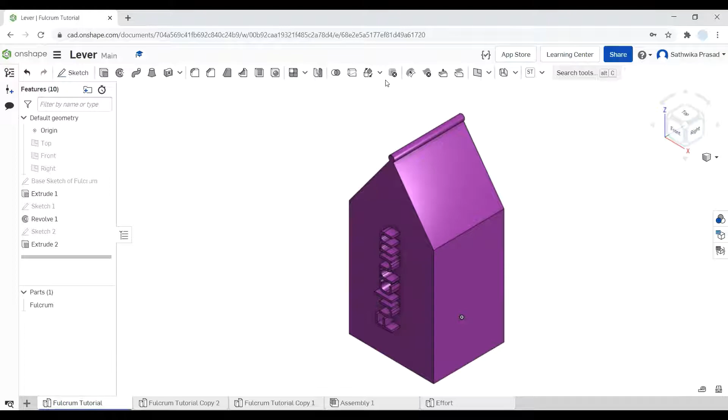I'm going to start off by making another part studio, and I'm going to right click and rename it to effort tutorial.

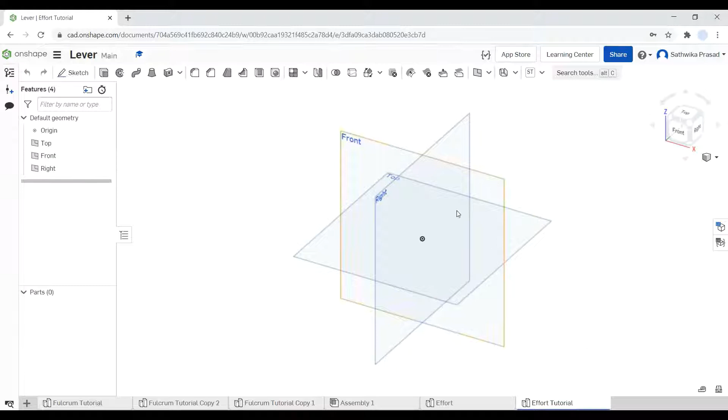So for this video, I'm going to make my sketch, if I'm not wrong, on my front plane again. I'll right click, make a new sketch, and start off by making it my view normal sketch plane.

So in this video, I'm going to introduce a new method of making arrows. If you notice, in this arrow my arrow is facing downwards, and my next arrow I'm going to make it face upwards. So I'm going to draw my line.

All right, so for this sketch, what we're going to do is start off by sketching this base arrow. How we're going to do that is we're going to mirror this.

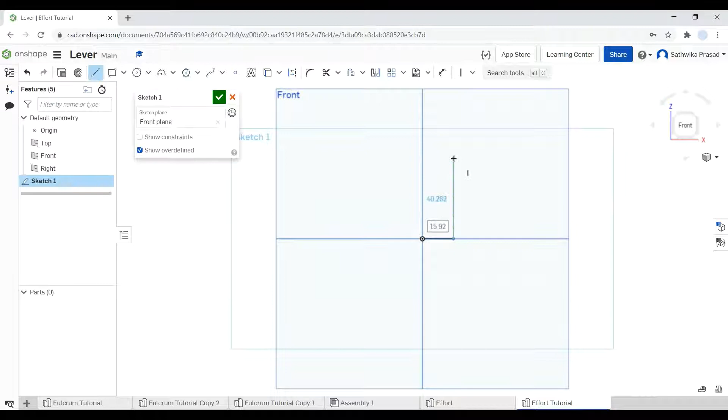So I'm making it again reflected, facing upwards. I'm going to make a sketch on my front plane, then make the base of my arrow, the body of the arrow, the little bit that sort of branches out of the arrow, then the line again, and then a dot that connects to the origin.

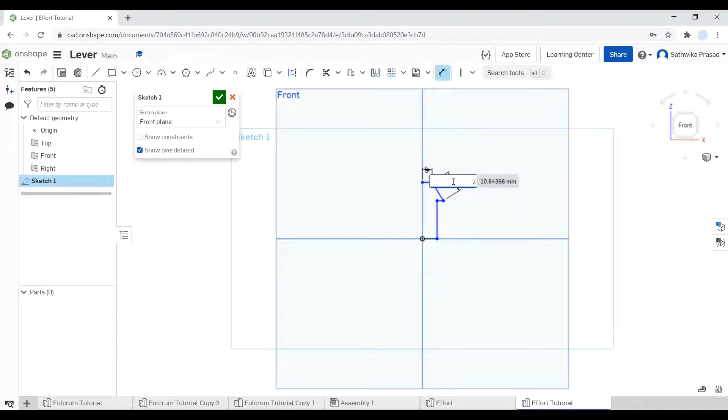Now I'm going to dimension everything. I'm going to make the top line 5, and this line 25. Actually, before I do 25, I'm going to delete this dimension. I want to make this line 40.

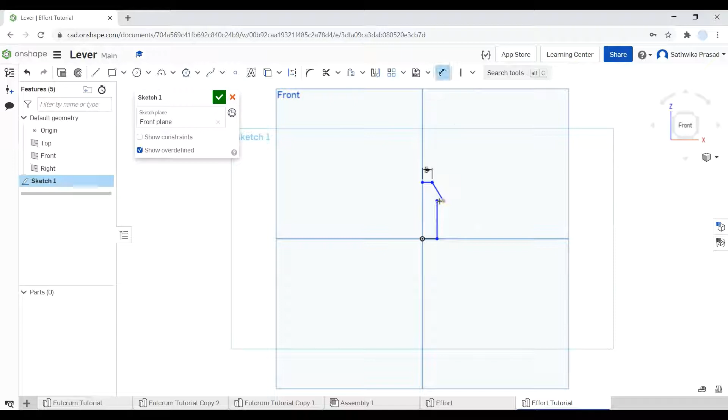Oh, no, I regret that. No, that's not what I want to do. No. All I want to do is just dimension this too. Oh my god, okay, I'm sorry, I apologize. I am having technical difficulties today. There we go, finally. Ugh, that took forever to do.

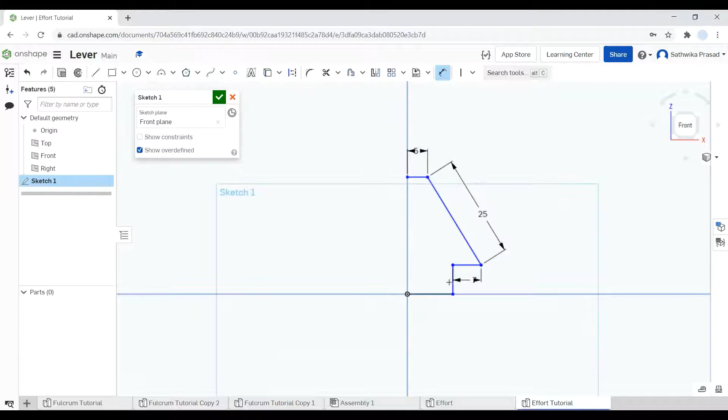Okay, this one's going to be 40. There we go, okay, everything is fixed, everyone is healed. Okay, and then the base has a dimension of 15.

So I apologize for all of the technical difficulties along the way, but these are the dimensions: the top line should be 5, the body should be 25, the little thing that pops out should be 7, the body of the arrow should be 40, and the base should be 15.

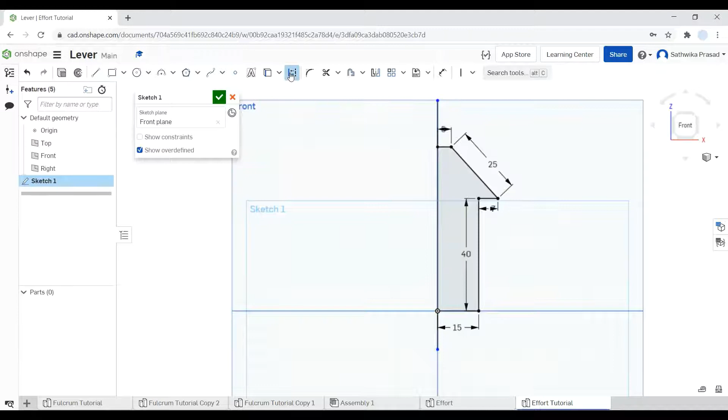So now what we're going to do is make a line from the start of the plane all the way to just a little bit down from the base. I'm going to click escape and make this a construction line. A construction line makes sure that Onshape identifies the line as not part of the original sketch.

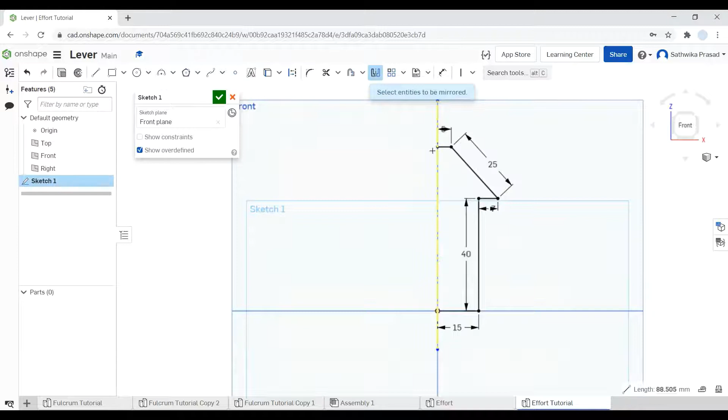So now I'm going to select the mirroring tool and select the construction line for my mirror line. For the entities, I want to mirror this entire thing, so I'm going to go from one point all the way down to the base, selecting every single point, and that seems about right. So I'll click the green check.

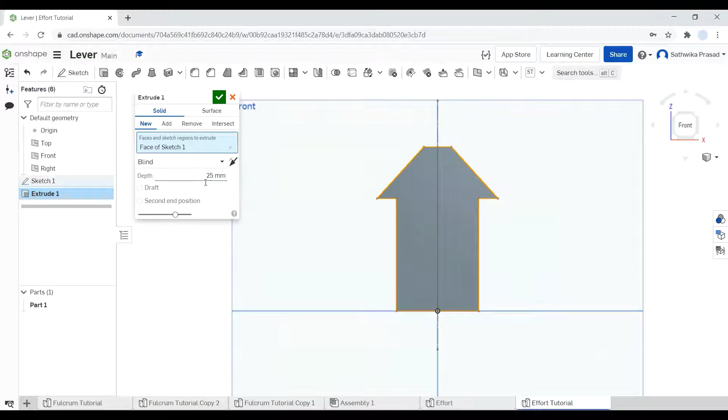There's our mirrored arrow. Now what I'm going to do is extrude the sketch. I'm going to select it, make sure it's on new, then make sure the extrusion depth is 25 millimeters. If you haven't noticed, I'm using millimeters for my entire document, so please do change your dimensions to millimeters.

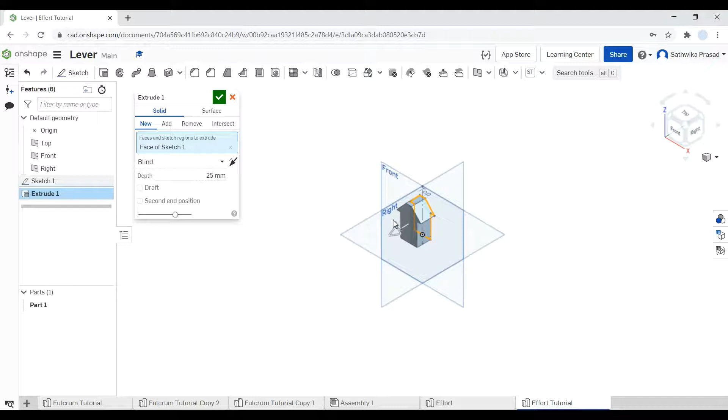So if I check an isometric view, the extrusion is successful. If you're having trouble with this, please do make sure that you do the mirroring line thing correctly - there should be nothing else wrong here. Then I'm going to click the green check.

Now what I'm going to do is just hide all of the planes, because all that's left is to just make the text.

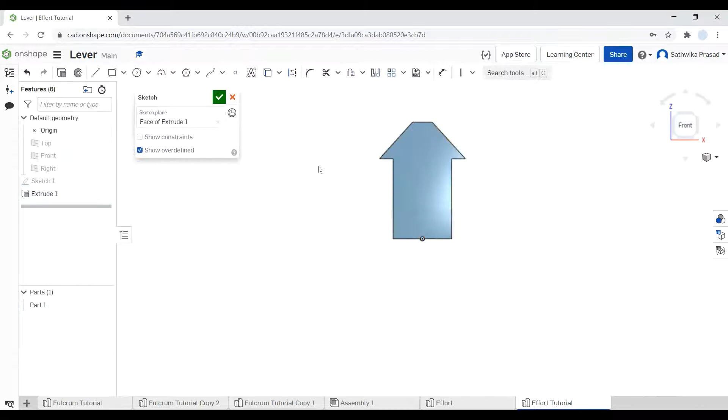I'm going to my front plane, hiding all of my views. Then I'm going to start a sketch on this front plane. I'm going to make a text box from here all the way down, and I'm going to label this 'effort'. So if I make it effort, this is going to be that.

Now, if you haven't watched my previous video, please do watch it, because it goes over how to make the fulcrum, which is really important for any lever.

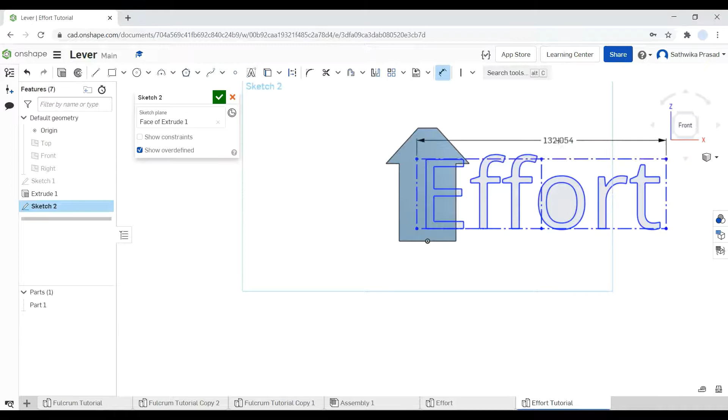I'm going to dimension the text to become smaller. So how I'm going to do that is I'm going to go to the dimension tool, click on the top edge of the text, and make it 25 millimeters. I feel like that's a good base to start off with.

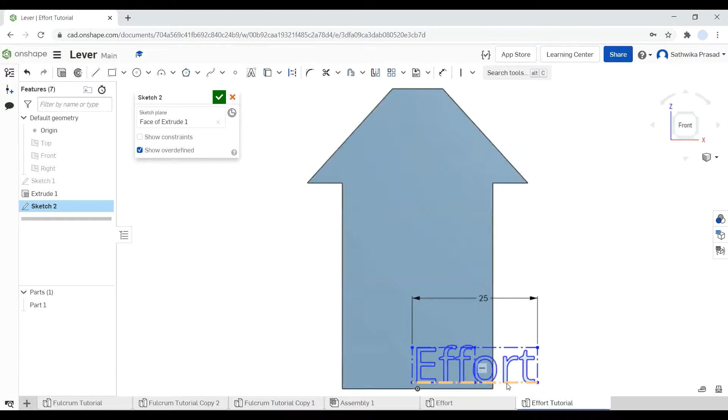We can make the text bigger and smaller accordingly. I'm going to recenter, come out of the dimension, and hover over the bottom construction line of the text, which will give me this horizontal constraint that pops up. I'm going to right click and click on delete sketch entity. This gives me the opportunity to make the entire text vertical by going to the vertical constraint and clicking on effort. I made it vertical. Hip hip hooray, okay, that was a bit cringy, but okay.

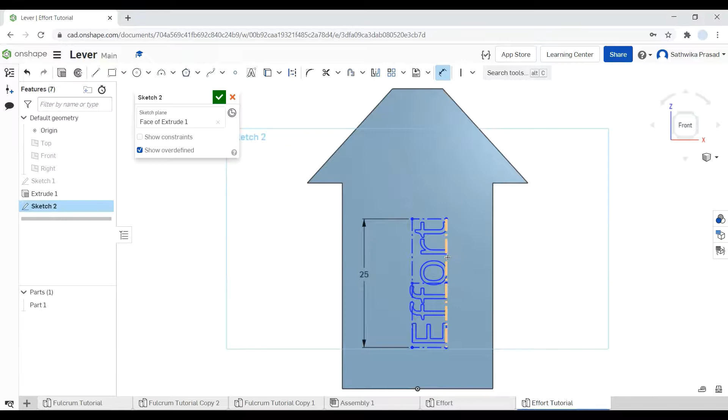Now I'm going to dimension it, making sure the distances are all correct. I want from this edge to this edge to be 12 millimeters, and I want this 25 millimeters to be a bit bigger, so around 30 millimeters.

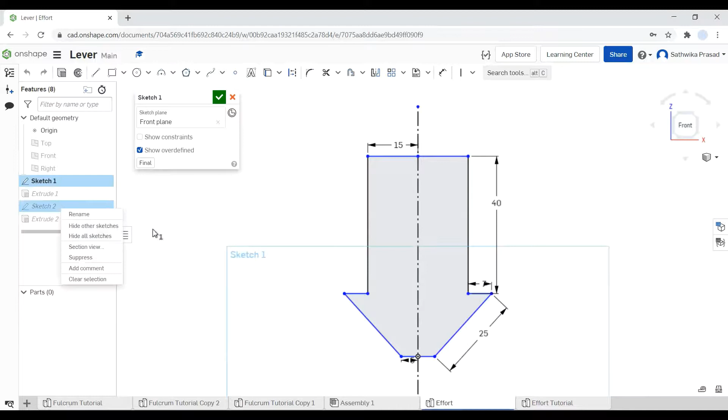Hold on, how big did I make this? Click the green check. This is why it's always helpful to have a base sketch that you're going to refer to. Obviously it's not always possible, but it's always helpful.

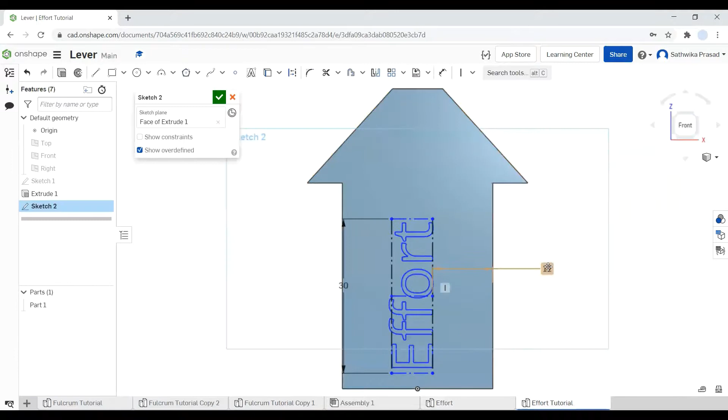So see how I noticed that I made my text 30. The distance between the top and the bottom should be 10, and the distance between the sides should be 10. So I can edit that. I made mine 12, so I'm going to make it 10. My distance between these two is going to be 10.

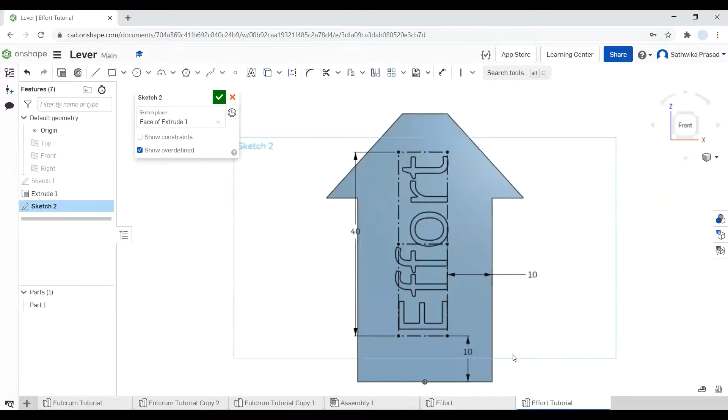And I'm going to make the number 40 so it can be a bit bigger. This is most likely what I want mine to look like. I'm going to click the green check button. Now all that's left is to extrude.

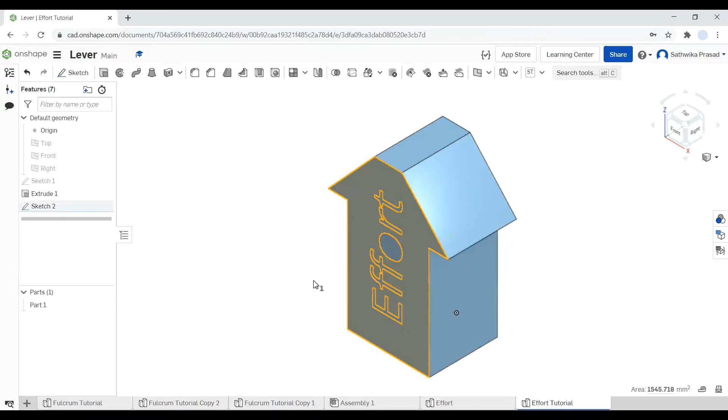I'm going to go into isometric view, and this is a very important step that many people get wrong: only select your text. It should give you this weird grayish color. Other than that, if you click the entire sketch, it's going to completely leave the text. Don't do that, only select the text. It'll show everything in orange.

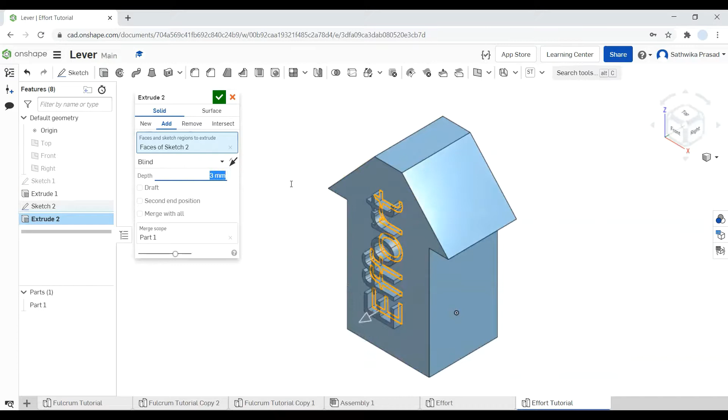Then you have to click on extrude, and it's going to ask you to extrude it for 25 millimeters, that's default. Make sure you're in 'add to', and change the dimensioning to 3 millimeters, which will make it a lot smaller. Then click the green check button, and go to isometric, and it's finished.

Now what I'm going to teach you is how to change the color and the name of the part. So I'm going to right click, and rename it to effort arrow.

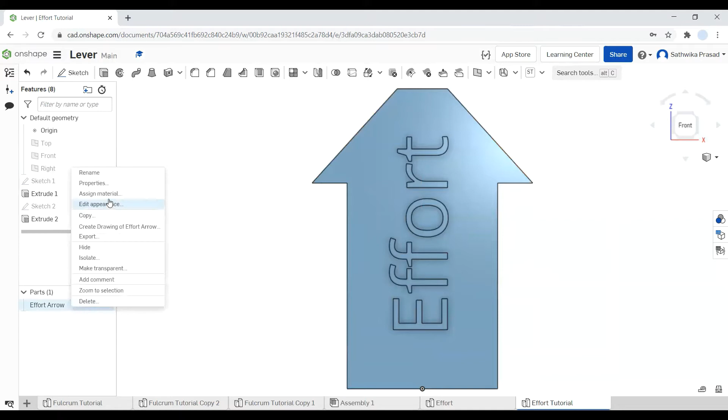Then I am going to right click and click on edit appearance. This will help me change my color, if you don't know that already. Here what I'm going to do is change the color to this nice teal color. Let me just make sure that's the same color as... no, it's not. Okay, so I'm going to right click, edit appearance, and I want it to be sort of a lighter color. This one seems just about right. So that's how you make an effort arrow.

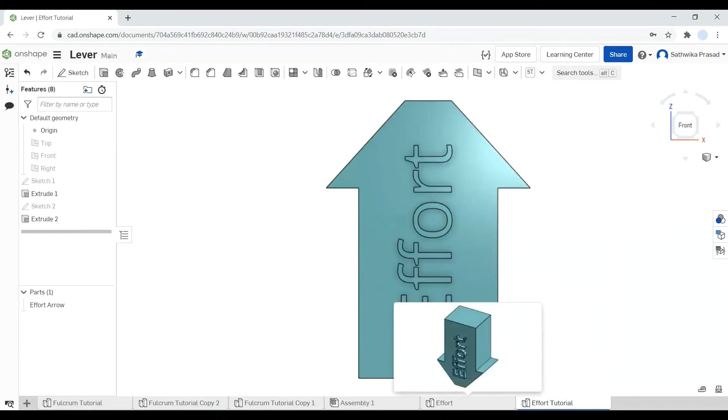I'm going to make one more copy of either the bottom facing effort and the top facing effort. So how I'm going to do that is I'm going to right click on duplicate, and I'm going to do the same for this one, right click and click on duplicate.